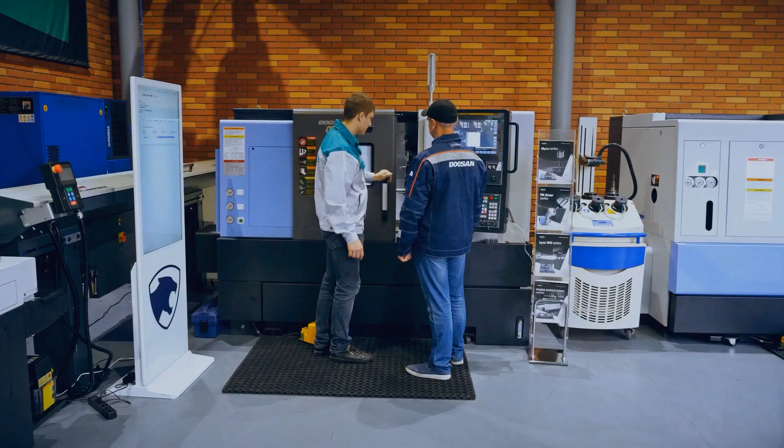More than 500 numerical control machines were supplied by VariUs to machine building enterprises of Ukraine within the framework of hundreds of complex projects. And all contracts with customers were brought to a pre-agreed result.

We are close to the client at all stages of work on a project, from obtaining a technical assignment and a drawing to implementing the production process through the supply of equipment, tools, and tooling, as well as working software. The customer receives a reliable and cost-effective technology, support, and improvement of the metalworking process, training of the factory employees, and as a result, the production of a component in the required quality with the best price.

In the digital age, when any information is available in one click, it is impossible to be successful if you work poorly. Reputation is formed quickly. The reputation of the company with the highest responsibility for the quality of the result. This is the secret of VariUs' success for nearly 20 years now.

The best confirmation of the reputation is the feedback from the clients, and the best exhibition of CNC machines is operating production sites. This film has both.

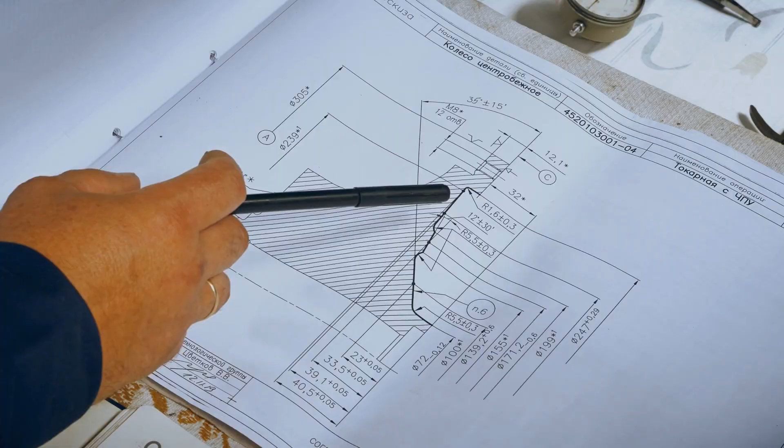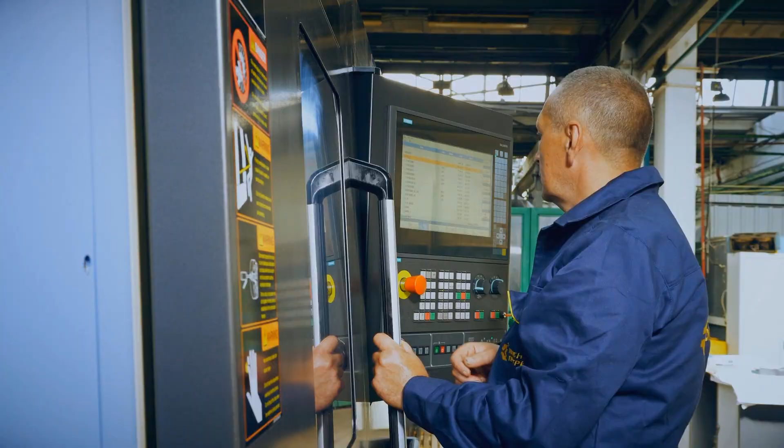The city of Zaporizhzhia, State Enterprise Machine Building Design Bureau Ivchenko Progress. It designs and serially produces, tests, adjusts, repairs, and maintains aircraft engines and gas turbine drives for industrial use. Provides aircraft engine service for more than 50 airlines around the world. It is a part of the Ukroboronprom concern.

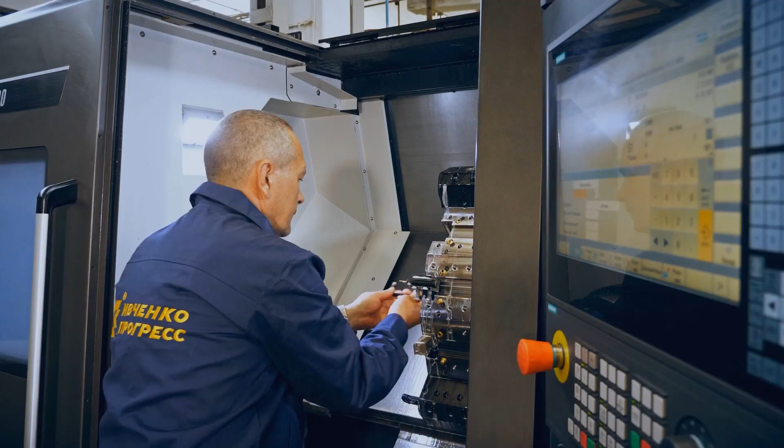By introducing Doosan Puma 4100 turning centers, the company has reached the required level of the production of complex parts for aircraft engines. Along the way, we solved a number of other tasks. That is, we took turning from other workshops and ensured its timely implementation within the framework of other contractual obligations.

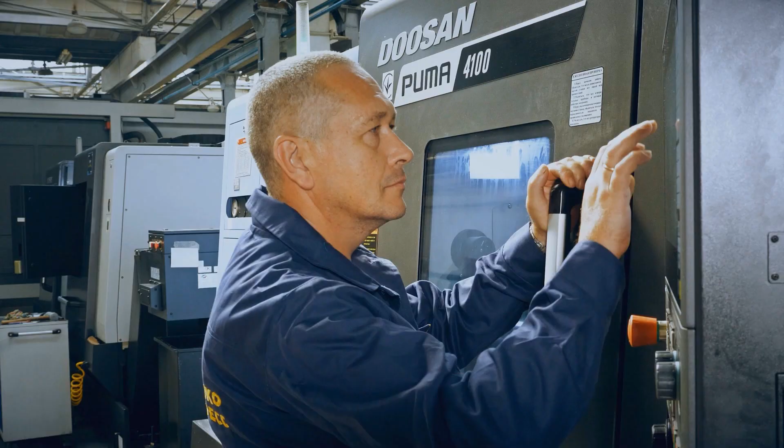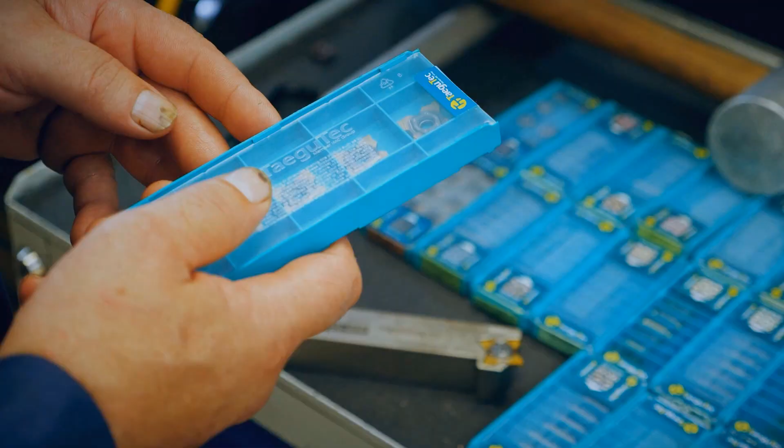At first, the management of the enterprise doubted the effectiveness of the South Korean equipment, but the partners JSC Fed and Motor Sich, already having such equipment, gave excellent reviews about it. Ivchenko Progress was not disappointed either.

The machines are very progressive, productive, and keep their precision characteristics. No breakdowns, no downtime. They work for us in a 3-shift mode 6 days a week. The functionality of the machines is at a very high level.

The accuracy of the machines is very important. The fact that there is no cone. We catch microns here, hundredths. This is important in our production for us.

Among other things, the Korean equipment that VariUs represents in Ukraine today is probably the best price-quality ratio. As for the tools, I would like to note that VariUs is the only company today that does not follow the traditional path that all resellers and suppliers follow.

That is, they do not say, we have the best instrument. They come, look at the task, and perform a technological solution for this task. None of the tool suppliers in Ukraine today do this.

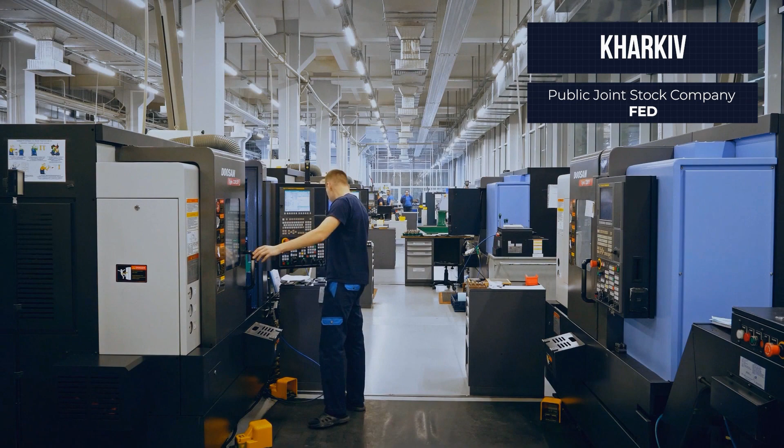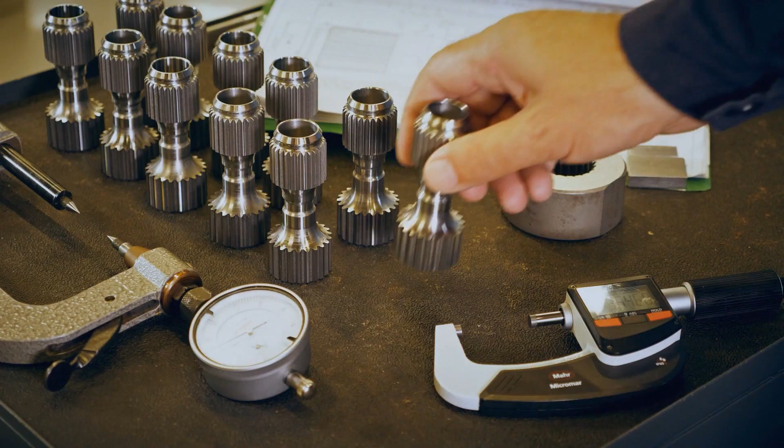Kharkiv City, public joint stock company Fed. It develops, manufactures, maintains, and repairs units for aviation, space, and general machine building purposes. More than 60% of production is exported. It has joint projects in aircraft construction with Canada, the USA, and Brazil.

We design and manufacture units for aviation technology. A feature of this type of production is accuracy. We purchase such equipment that would correspond to the technological capabilities, our drawings, and our products.

We bought German equipment, Swiss equipment, but if we compare the price quality, then the equipment of Doosan company falls into this, as I would say, the happy medium.

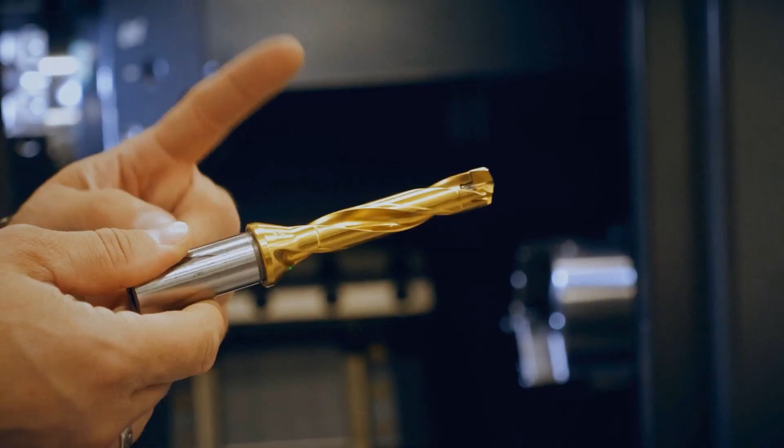We work 24 hours a day, 7 days a week. It is a continuous pace of production. And the indicator of reliability for ensuring this rhythm is very important.

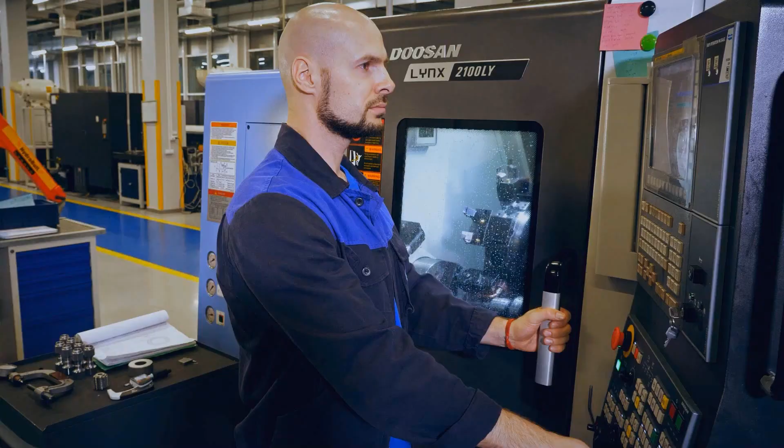Reliability, price, and quality of the equipment itself are suitable for our type of production. First of all, that is why Doosan Machine Tool Park has been expanding year after year. But there are other important indicators that determine the choice of Fed in favor of this partner.

The contractual terms are very comfortable for the consumer. Namely, it is flexible. But VariUs has no flexible situation to ensure uninterrupted operation. The reliability of the service is very important. I don't remember a single case when VariUs didn't react, or reacted late, or didn't react at all.

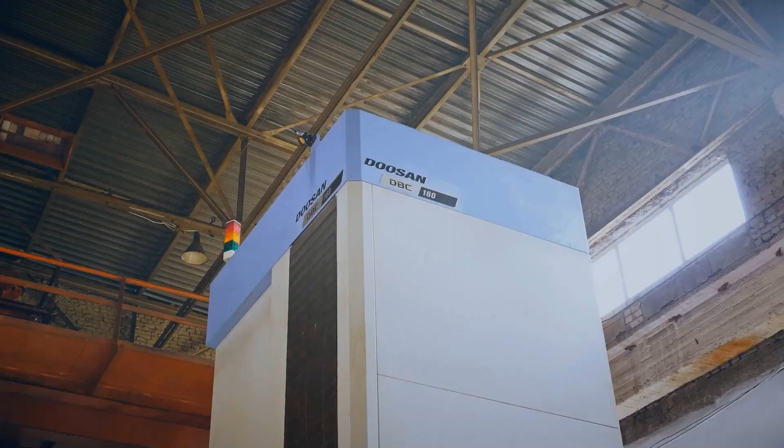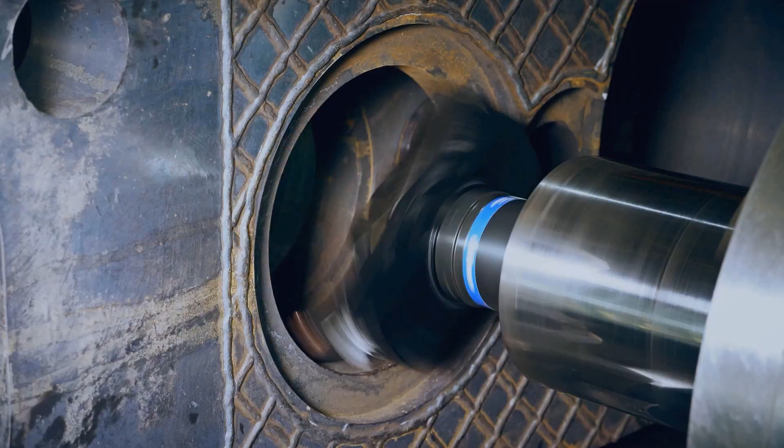Factory Svet Shaktura. It manufactures unique shearers for thin and medium seams, new generation road headers, modern scraper conveyors and reloaders, transformer substations, as well as infrastructure, equipment, and mine transport. Clients are the largest mining companies in Ukraine, Kazakhstan, Poland, Russia, and far abroad.

Cooperating with the VariUs company, we purchase from them high-performance, high-precision cutting tools, as well as equipment. In 2017, we purchased for the plant a South Korean 5-axis horizontal boring machine, Doosan DBC 160. This equipment and cutting tools has allowed us to implement a number of complex projects and increase the technological capabilities of the enterprise.

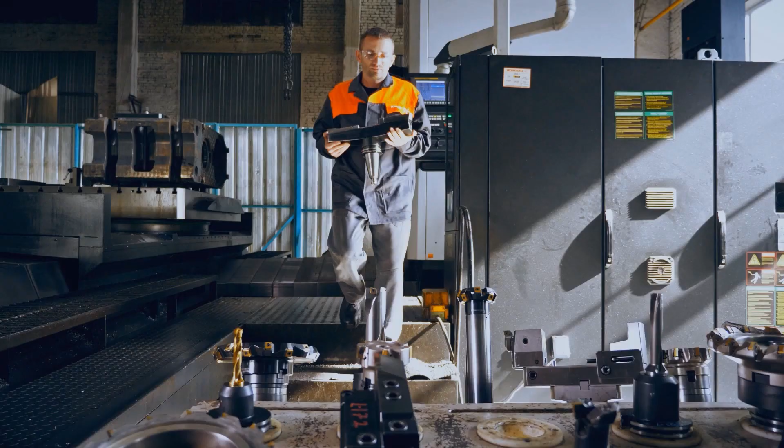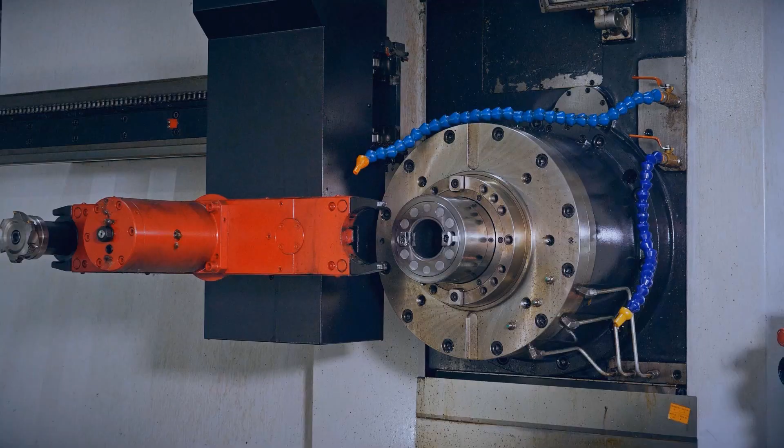Previously, the plant ordered large-sized parts for combine gearboxes from outside. The introduction of the Doosan machine cut this outsourcing threefold. The machine handles parts weighing up to 2 tons, up to 4 meters long.

The impressions from working with VariUs are very positive. This is a very interesting company in terms of introducing and improving the existing tools, introducing new progressive developments. In particular, new items are very often tested on the Svet Shaktura, those that are not even in Ukraine yet.

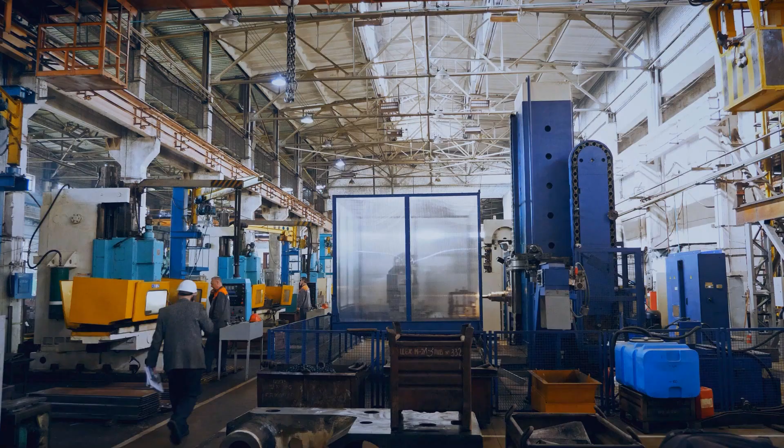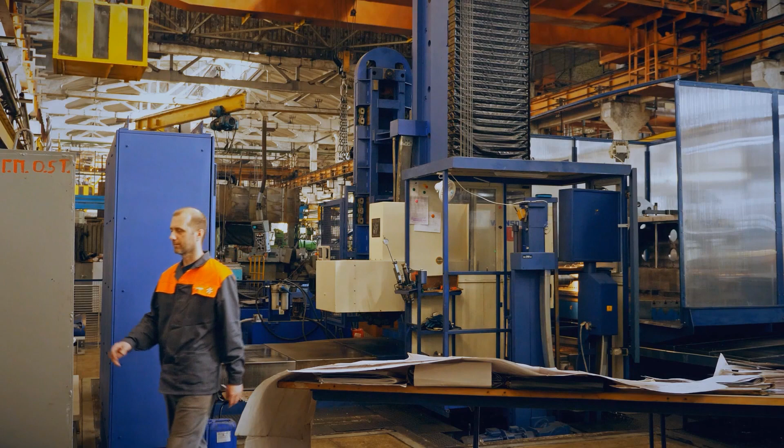The productivity has almost tripled thanks to the highly accurate modern TaeguTec tools supplied by VariUs. Excellent service. They respond instantly, sometimes by phone, but if necessary, they arrive within 24 hours. The partner qualities of VariUs were highly appreciated at the enterprise, and cooperation at the factory with the company is expanding.

In terms of further work, we plan to test further the novelties of the VariUs company and hope for a further increase in productivity of our labor. We are working with them on the purchase of further equipment. We are working on various technologies.

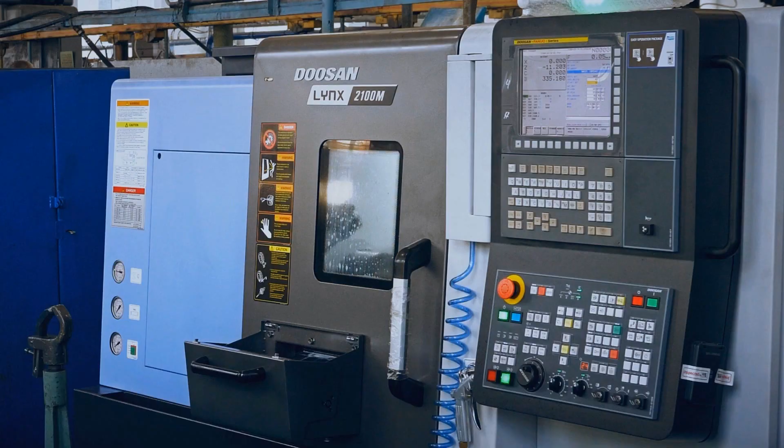Chernihiv region, industrial company Pozhmashina, leader in the Ukrainian market for firefighting, specialized and agricultural equipment.

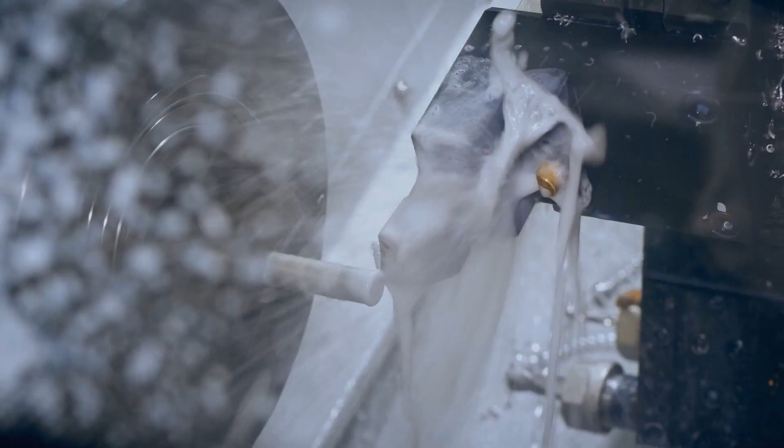The choice fell on the VariUs company mainly for two reasons. Firstly, it is an integrated approach to the supply of equipment. The machine is delivered, the technology is introduced, the staff is trained, the VariUs specialists perform test processing of the parts. That is the whole range of tasks that VariUs solves allows you to speed up the process of introducing equipment and technology in general to the enterprise. Secondly, in case of any service appeal to the VariUs company, the issue is resolved within 24 hours.

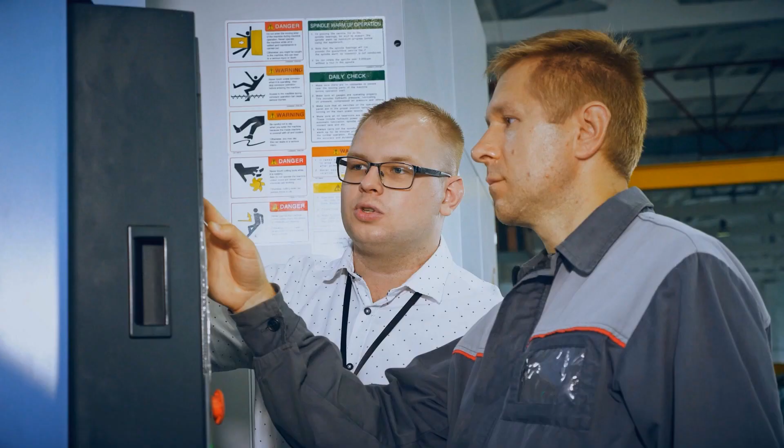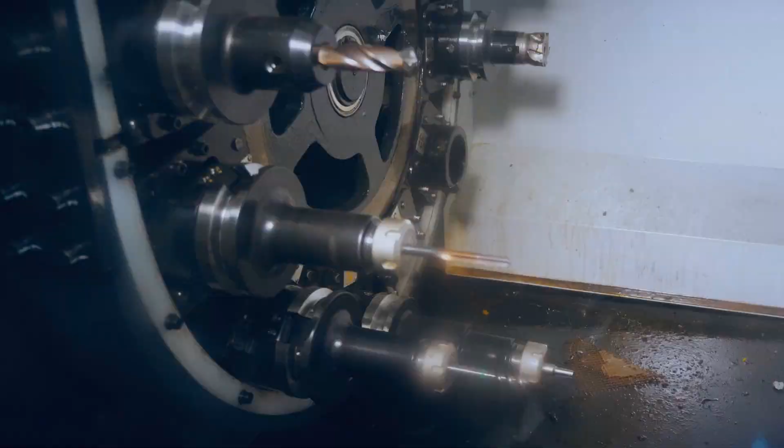The introduction of the 2-pallet horizontal milling center NHP 6300 improved the machining quality of pump parts and transmission parts and increased their productivity by 5 times. And due to the complex machining on the Doosan Lynx 2100 MB turning centers, the production time of parts of the body of revolution type has been significantly reduced.

For example, when making a pump body, we used to make it in 45 minutes. Now we make it in 15 minutes. This is a significant growth in quality of this part. Now I'm talking about only one part. We have hundreds of such parts.

The equipment is just superb, easy to maintain and adjust. The tool is cool, just super. Compared to what we worked with before, this is heaven and earth, I can tell you.

The city of Chernihiv, PET Technologies Factory, manufacturer and supplier of blow molding equipment and molds for the production of plastic containers. It has offices in 15 countries of the world. The partner network covers Europe, Asia, Latin America, Africa, USA, and Canada.

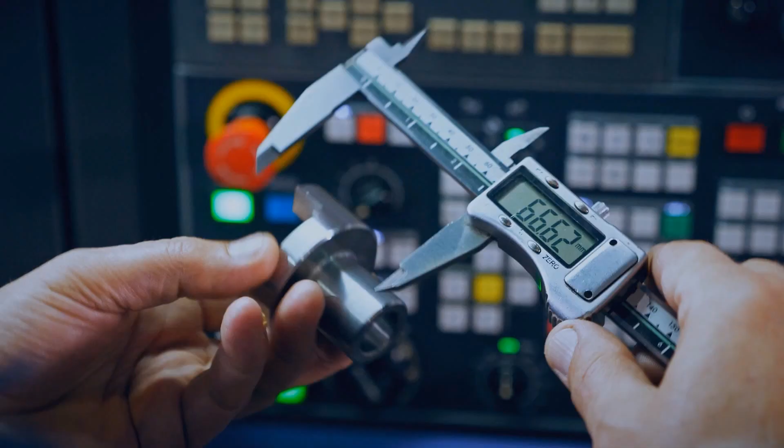We began our cooperation with the introduction of plunge milling technologies, with the introduction of the TaeguTec cutting tools. Prior to this, the proposals that came from the tool vendors were not followed by implementation. That is, there were catalogs, sites, price lists.

We chose VariUs because VariUs provides full technological support for the project. This is the introduction of the tool. This is the launch of equipment, service support of equipment, both warranty service and post-warranty service.

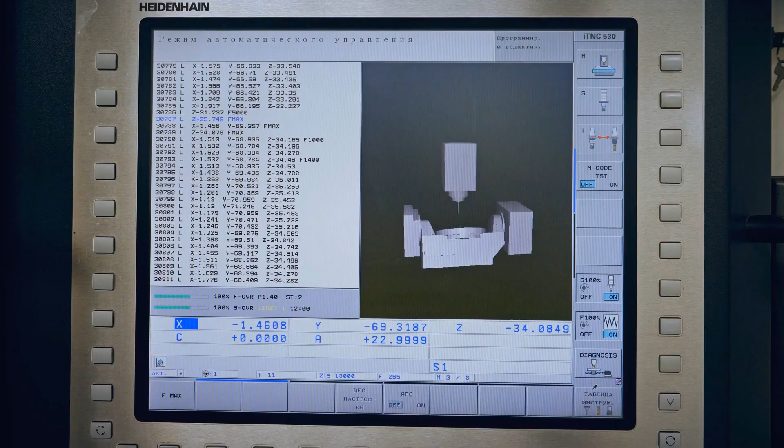The usual effect of using TaeguTec tools is to improve the quality and reduce the processing time of parts. The experience of the PET factory was no exception here. However, as well as in the operation of Doosan equipment, the equipment manufactured by Doosan is at a high technological level.

The machines are quite accurate, productive, and allow you to perform any tasks that are in the enterprise. The functionality allows you to quickly, efficiently, in the shortest time to carry out the adjustment, thereby significantly reducing the time of production.

Doosan is one of the world's top 5 machine tool manufacturers. At the same time, price-quality ratio distinguishes them favorably from European manufacturers.

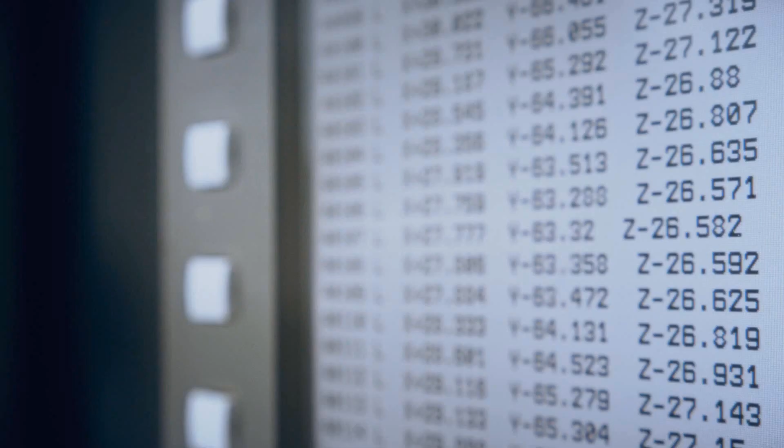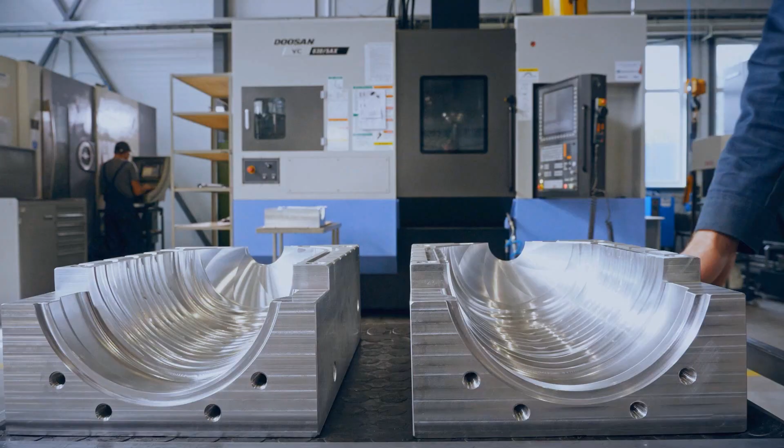The comfort of cooperation with VariUs is provided by many factors. One of them that customers mention especially often is the speed of the supplier's response to questions that arise from customers. VariUs has a service department with a very high response speed. And as a rule, those who have worked with VariUs don't search for another supplier.

We value VariUs Group first of all for its reliability, openness, honesty, and the ability to solve any problems together.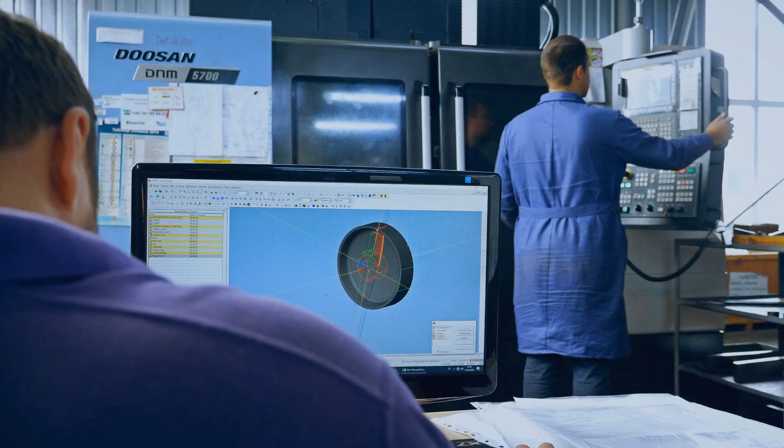Group of companies Mager. It develops and manufactures woodworking equipment for the production of insulating and building materials, products for the defense complex of Ukraine, modern forging and pressing equipment, building materials, and various plastic products.

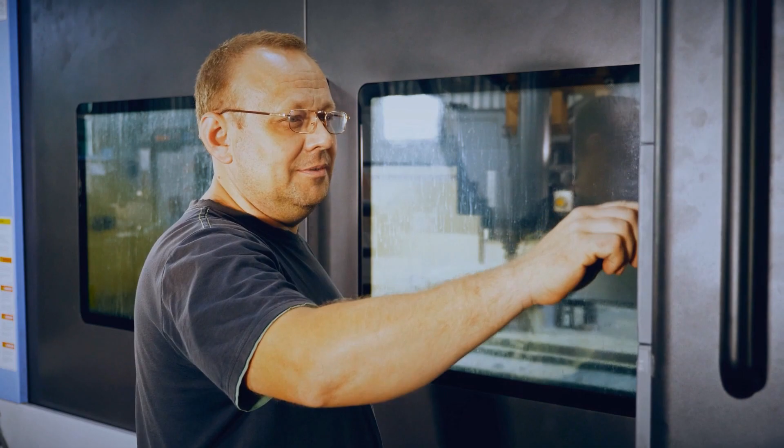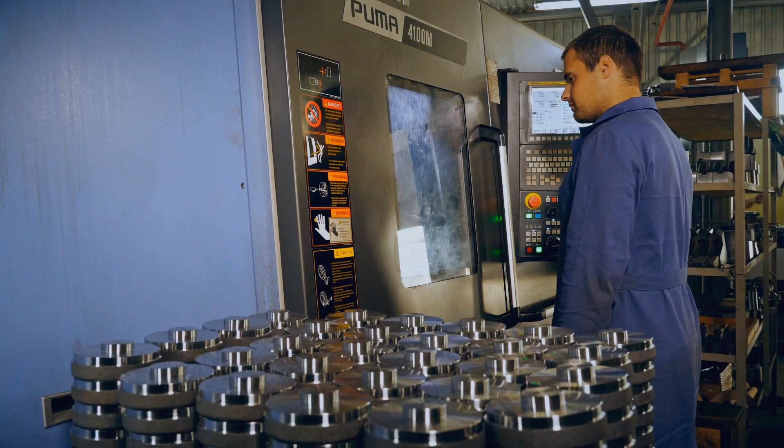We bought the first equipment from them partly on the basis of recommendations, but the main thing is the ratio of price and quality and the availability of service in Ukraine. Quality service in Ukraine. The request from Mager was not easy.

To release new products, it was necessary to choose a profitable production strategy, determine the correct set of equipment and tooling, calculate the payback taking into account the technological cycle, recruit and train a team.

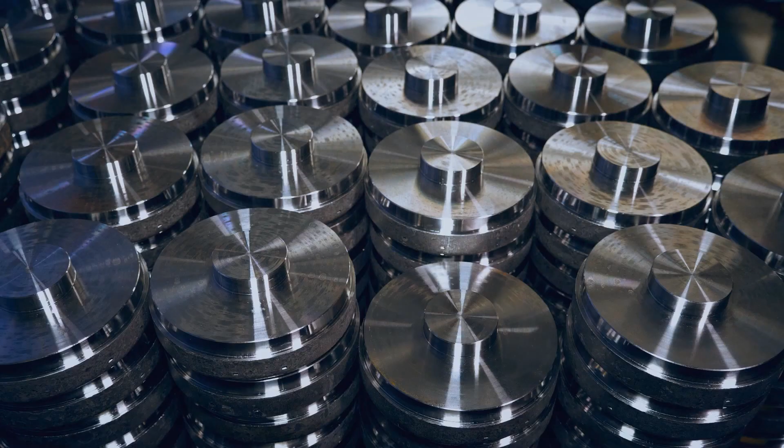We bought equipment from them by reference to part. That is, we gave them either a drawing or a 3D model of the part. Proceeding from this, they prescribed programs for us, handed over equipment, and trained our personnel first. Well, and so on. This is the whole complex of these questions.

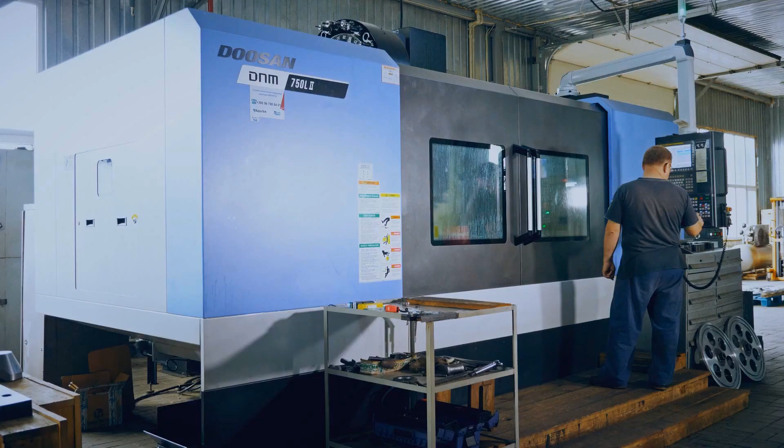The task was solved promptly and at the highest technological level. The customer is satisfied with the approach of VariUs to business at all stages of cooperation.

This is something new in this life. In my opinion, one not quite typical step for our time is under what conditions we brought them. The second step is how they relate, for instance, to the visit, to the warranty obligations. People do not behave quite typically for our market. There is a novelty in this, and they have additional competitive advantages.

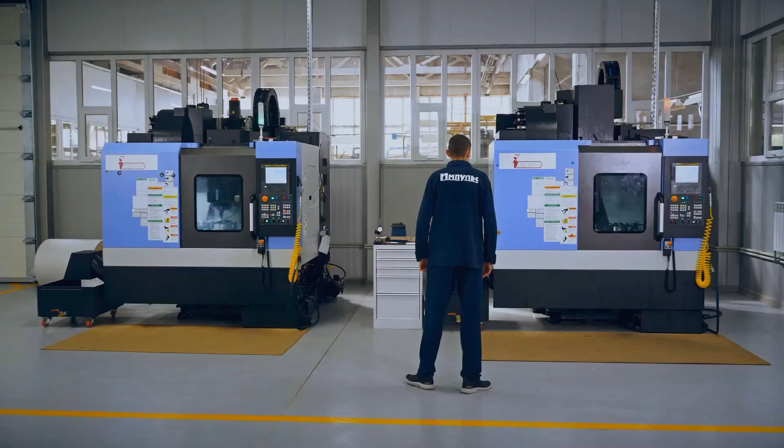Sumy region, Shostka state plant Impulse. It produces means of initiation of an explosion and supplies them to mining, coal mining enterprises, construction companies. Also produces pyrotechnics and a wide range of civilian products. It is a part of the Ukr-Oboronprom concern.

We have done a great job of finding suppliers. When VariUs offered the best financial conditions and we decided to hold negotiations, from the first meeting it was clear that this is an organization that fully understands our goals and objectives, fully owns the market situation, and is fully ready to offer the range of services that we need.

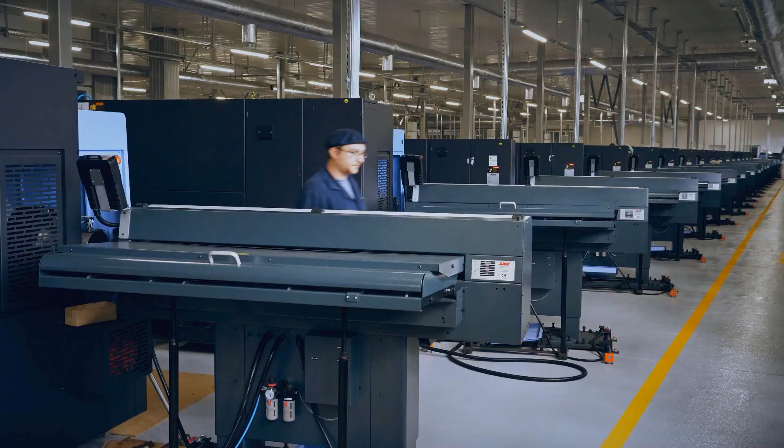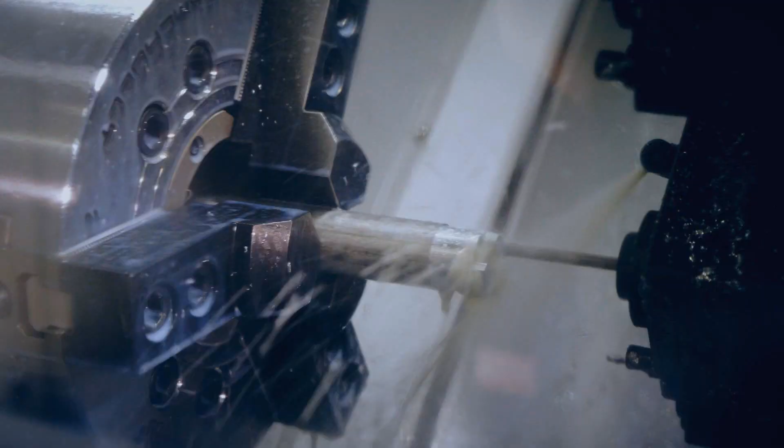VariUs offered excellent warranty conditions, as well as, in conjunction with the supply, implementation of machine tools, writing programs for the release of specific parts, also means of automating the technologist's workplace and multi-stage training of employees.

We have mastered the manufacture of new types of product, components for new types of product. We raised the class of some positions of the tools. We got the second, third class of accuracy. Accordingly, the interchangeability of parts began to grow, which speaks of the accuracy of the dimensions, of the accuracy of parameters.

The first task we faced was government orders. We have started and are ready to do it.

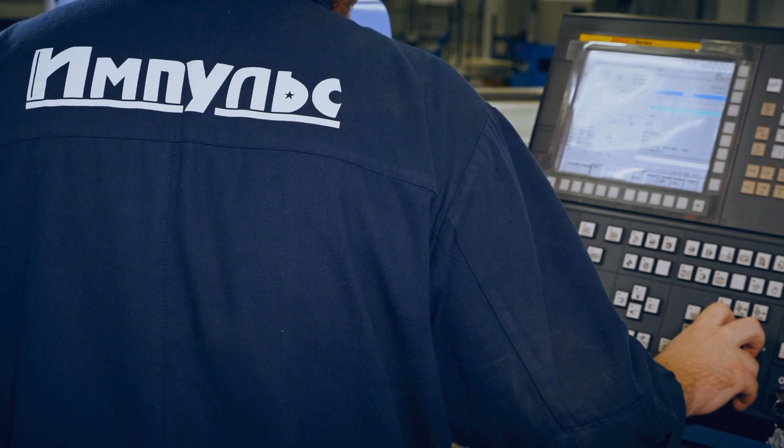Time is a precious resource in production. This is well understood here, and the complexity of VariUs supplies is assessed precisely in this aspect. The question raised from our side is followed by a prompt response from ITC. This is what is beneficial, the time that they allow us to save.

We look forward to a great perspective of cooperation with this company. This is the future of our enterprise.

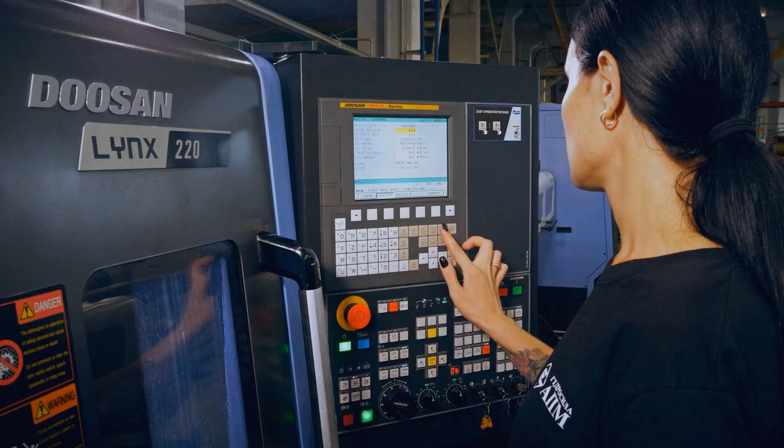The city of Kropivnitsky, PJC Hydrosila APM, the leading manufacturer of hydraulics for mobile equipment in Eastern Europe. In addition to domestic enterprises, it supplies products to the USA, Turkey, Slovakia, China, Thailand, Belarus, and other countries.

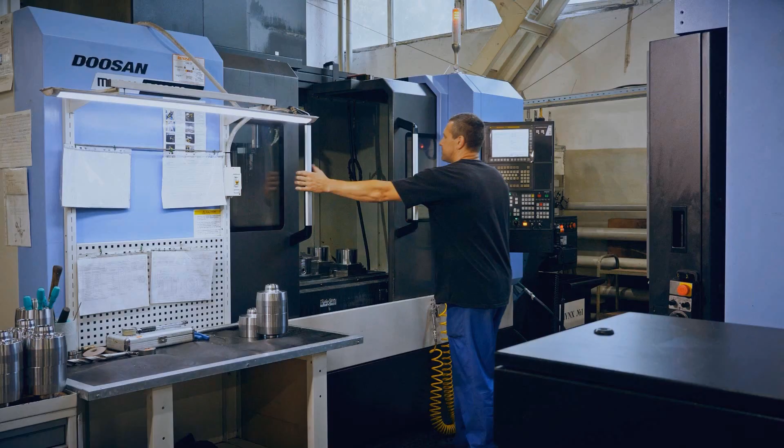The main task that was set when purchasing equipment in a complex project was to ensure performance on this equipment. And all projects on 19 machines were handed over as we concluded in the contract, and then they were supported.

The price-quality ratio for the supplied equipment and tools suits us. Therefore, we continue to work with the VariUs company.

Doosan machines allow us to significantly reduce the amount of manual labor. Therefore, my impression of Doosan machines is purely positive. Plus, Doosan machines are equipped with part control sensors, tool breakage control sensors, which significantly speed up the work on CNC equipment.

VariUs is a main supplier of cutting tools. Taegutec, Iscar. The special tools are also involved. In addition, those novelties that are introduced to the market by tool companies represented by the VariUs group immediately find application in our company.

At least in Ukraine, I'm not aware of such companies that would provide a full range of services.

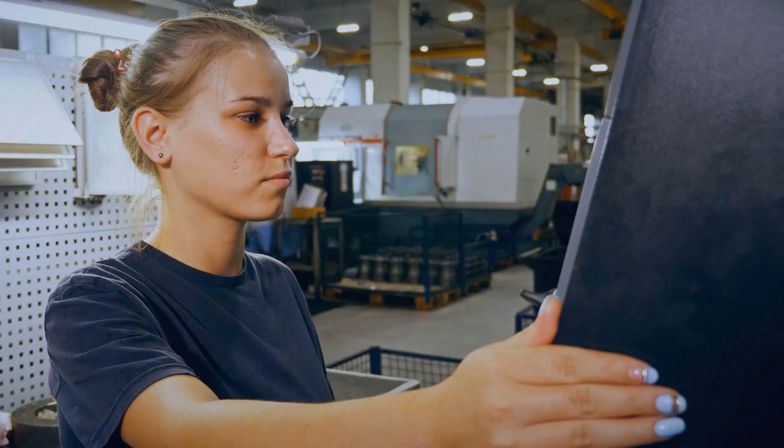Complete Suppliers Engineering is not only about saving time for the enterprise. Uninterrupted operation of the equipment which VariUs provides is also a significant saving of money. The downtime of the machine for some time can, in terms of cost, surpass the cost of the machine in general.

It has never happened that our signal was not responded to or we didn't receive help within 24 hours. Well, I don't remember such an incident.

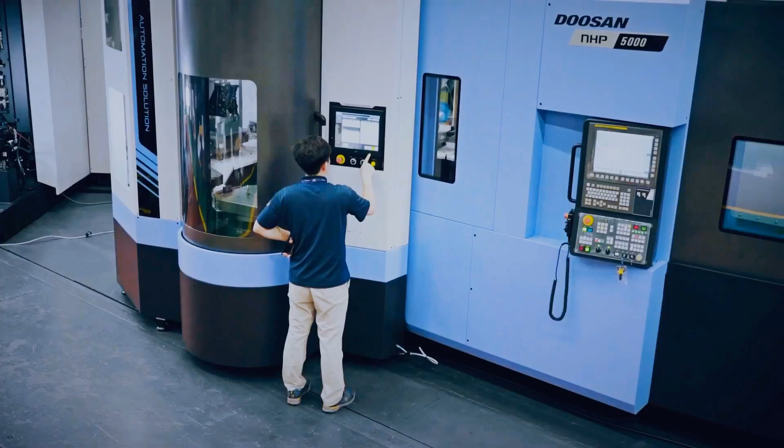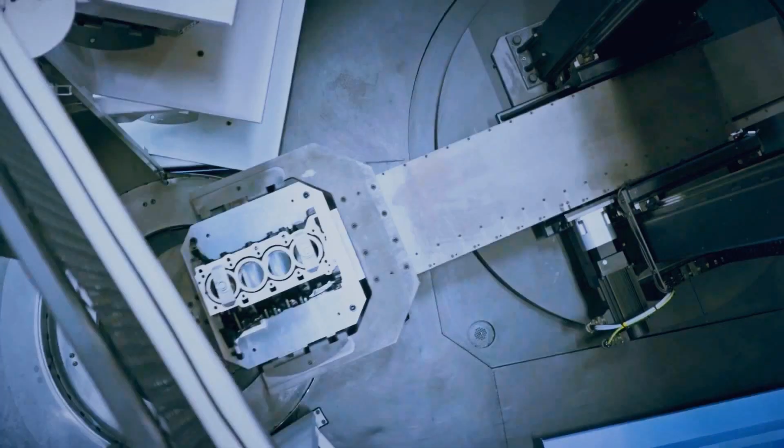Continuing the comprehensive supply of CNC machines and cutting tools, VariUs is actively increasing the offer of elements of Industry 4.0. Equipping enterprises with cyber-physical systems, controlling new generation programs, gives an incomparable increase in product quality while reducing its cost.

On the recommendation of VariUs specialists, the company acquired a license for a modern CAM system of the American production DP technology, Esprit CAM. This software made it possible to reduce the time for the development of control programs by up to 30%, to unify the equipment control systems. This system also allowed us to minimize human error.

We purchased a matrix toolbox, which allowed us to reduce the costs of issuing and accounting for tools. It also allowed us to track missing items on time, which reduced labor costs and shortened the production time.

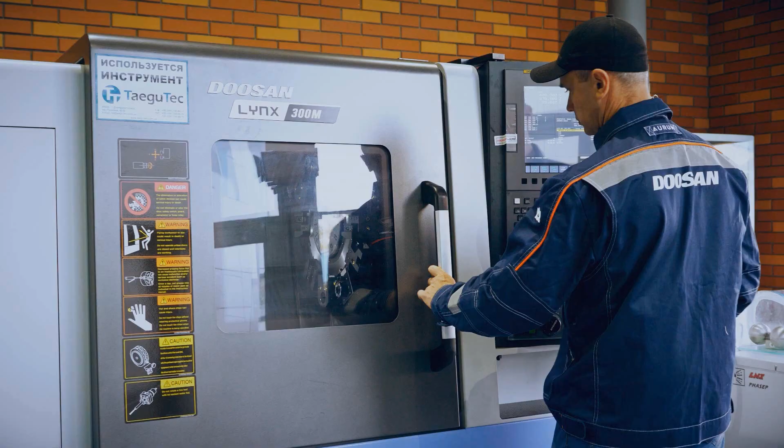VariUs is the first company in Ukraine that has created its own system for monitoring the efficiency of equipment operation with numerical control. This element of Industry 4.0 has already been implemented at several Ukrainian enterprises.

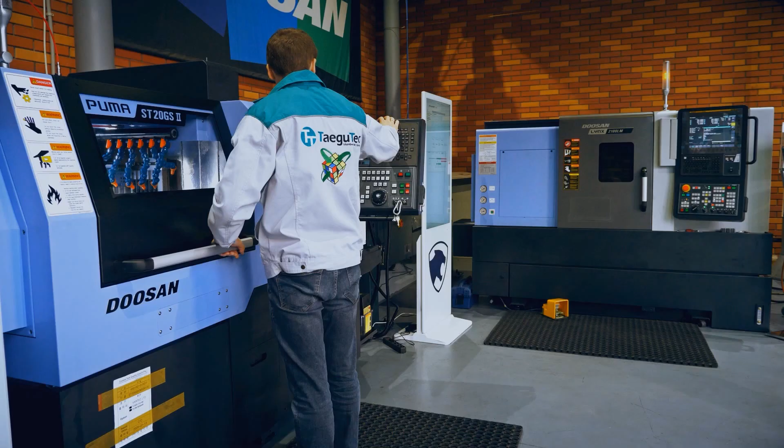This is a smart project, smart production, where without leaving my office, I see all this. And not only me, but the entire management sees the real work and equipment downtime. And accordingly, whether the standards are being met, whether the tasks set for the performance of the equipment are being fulfilled.

VariUs implements elements of Industry 4.0 at its own premises. IT department specialists have created a digital analog of the company's exhibition stand, the first in Ukraine. Clients of VariUs can visit this virtual exhibition of tools and equipment at any time, and not on strictly defined several days a year. Visitors to the stand have the opportunity to regularly learn about the latest Doosan equipment, Iscar and TaeguTec tools, during online presentations of the production of interesting test products by VariUs technologists.

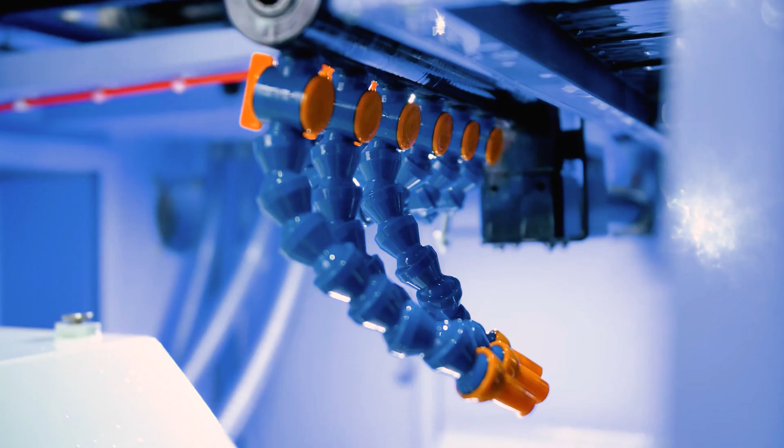Also, enterprises can participate in training seminars, conduct test drives of the machines in VariUs showroom in the city of Dnipro, test new metal cutting tools at their production sites.

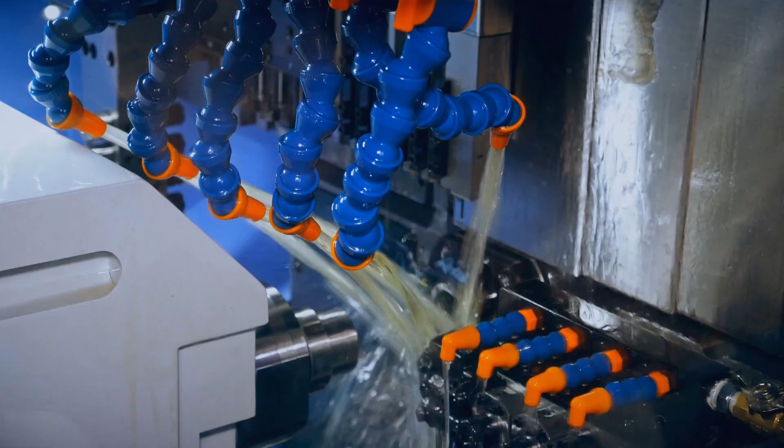The introduction of CNC equipment into production, and especially digital control methods, gives enterprises significant savings in time and money, allowing them to improve product quality without additional investment.

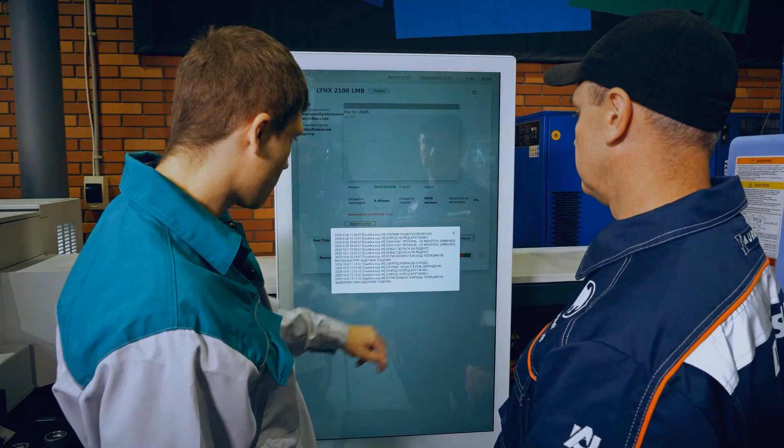A new industrial reality is being formed in the world. VariUs is a direct and active participant in this process in Ukraine, involving more and more enterprises in it from year to year.

VariUs Group of Companies. We create a new industrial reality.